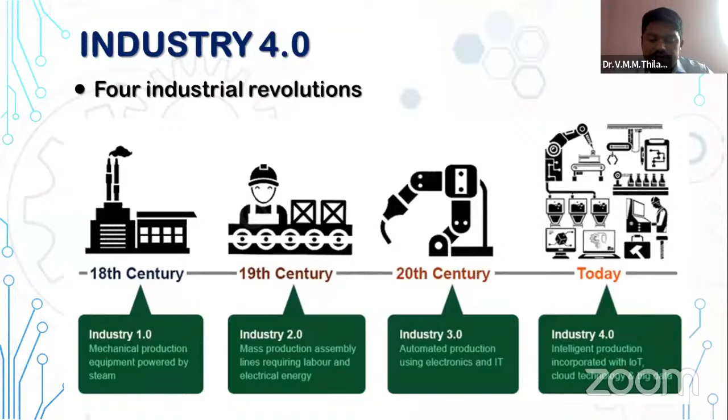So these are the enablers for Industry 4.0: first, Internet of Things, big data analytics, machine learning, augmented reality, and cloud manufacturing. All these are different enablers for the Industry 4.0 sector. We have devices like RFID, sensors, and actuators used in order to get more data for Industry 4.0.

There are many Industry 4.0 examples I can quote. One good example is fund transfers, which we use in recent times - we don't use actual cash now. Very soon, even this virtual cash transfer is going to be revolutionized by decentralized cash transfer systems like blockchain technology. We already started having cryptocurrencies which can be used for transactions. In the near future, we will have cryptocurrencies in place of actual currencies. Using blockchain technology, even property sales and everything will be done using blockchain. Real estate, banking sector, everything is going to be revolutionized because of blockchain technology.

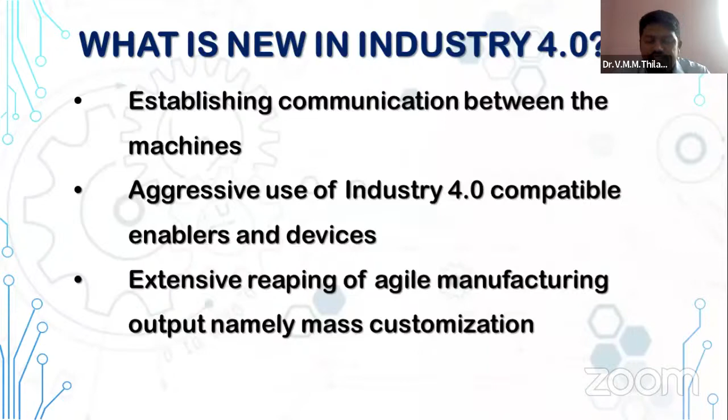Regarding my research work, as mentioned, I completed my full-time research in 2016-17. At that time, I did my research on Internet of Things. What I did is I took a traditional manufacturing product, a pump. I took three different types of pump, added internet to it. All the data were recorded and it was controlled using an app. I'll explain it as a case study for a better understanding of the use of technology using IoT and Industry 4.0 in agile manufacturing. So in future, just like the pump and all other devices, every equipment around us will have a network.

All these things, even lights, will be connected. Now we have devices like Alexa. Just the moment you enter the house, you can ask Alexa to switch on all the lights, switch on the air conditioner, refrigerator, even the stove. Because every device in future will have internet in it, and it will capture all the data and be remotely controllable. These IoT devices will include sensors, smart locks, smart lighting, and many embedded systems.

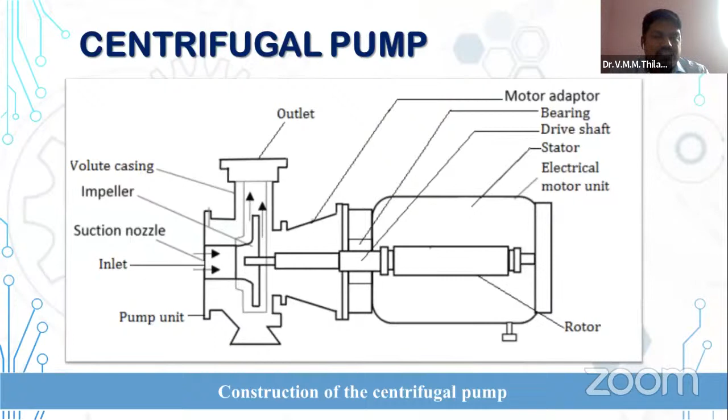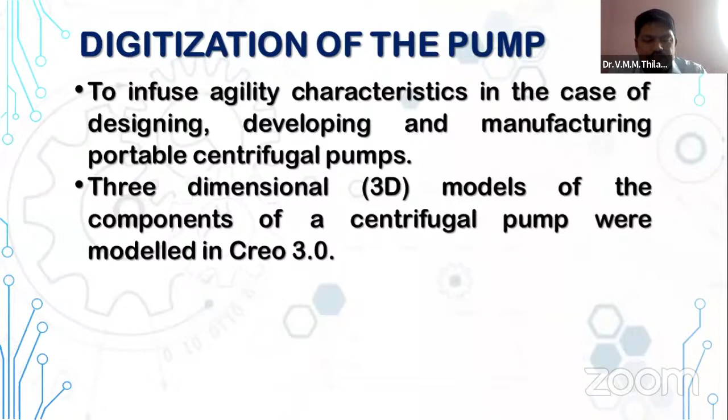So using the monoblock centrifugal pump, I took their different drawings from their data and devised a digitized version, a 3D model, in order to infuse the agile characteristics. A digitized three-dimensional model of the components of the centrifugal pump was modeled. You can see different components were modeled using Creo software. After designing all these components - finally, they don't have such a digitized version, which is the main disadvantage of traditional manufacturers. They don't have the digitized version. Only when they have the digitized version can they make further changes in the same product.

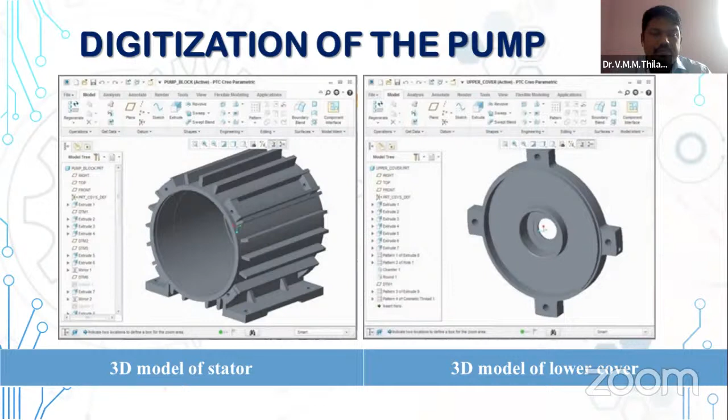The absence of such technology has stopped them from adding R&D to the existing product. So the existing product has been completely digitized, and then we carried out a study on the factors that customers prefer.

So I used a fuzzy AHP approach, an analytical hierarchy process, in order to prioritize three features. The first feature is functional features, the second is ergonomic, and the third is aesthetic.

All customers give more preference and choose to buy a product based on these three features. If a customer goes to buy a product, either online or offline, they give importance to these three. This was found using the fuzzy AHP approach, where other features like cost and brand were also added, but only these three were prioritized compared to all other features at the end of the fuzzy AHP results.

When you compare the functional features, that is the performance of the pump or product, customers give more importance to functional features rather than ergonomic and aesthetic features. High importance is given to functional features. If you see a pump, they give importance only to the HP - how much power it can pump, how much discharge it can provide, how much height it can pump. Only those functional features customers give more preference to.

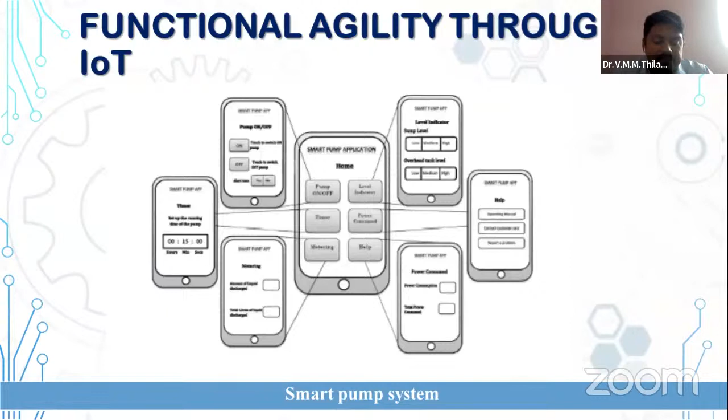You can see here, we have sensors, as I mentioned earlier, in the sump and the overhead tank. Once the overhead tank level goes down, immediately we will get an indication in our app and it will switch on the pump automatically. We can monitor everything using our mobile phone itself, using the smart pump app.

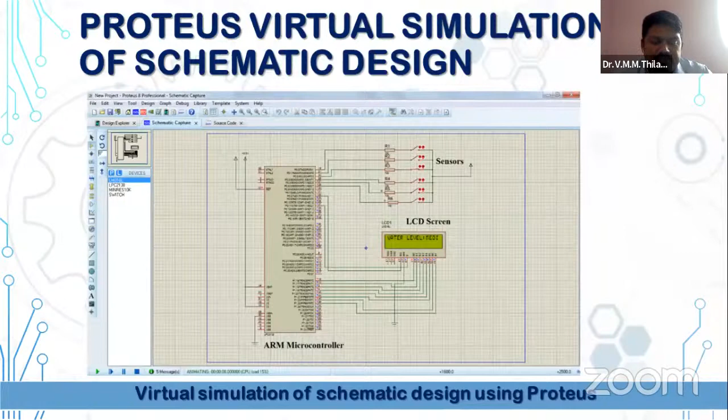So this Internet of Things, which was added to the pump, has been an innovative feature.

After designing and developing the smart pump app, I presented it to the manufacturers and they were excited, and they have taken it for further research.

Because once they adopt it, it will be an innovative feature which will excite the customer. If you say that there is a pump for sale which has innovative features, which has internet you can control using your mobile phone from anywhere, and you can also track the amount of water discharged, what is the level - everything can be seen in your mobile phone - of course people will be excited and people will be ready to show it off to their friends and relatives.

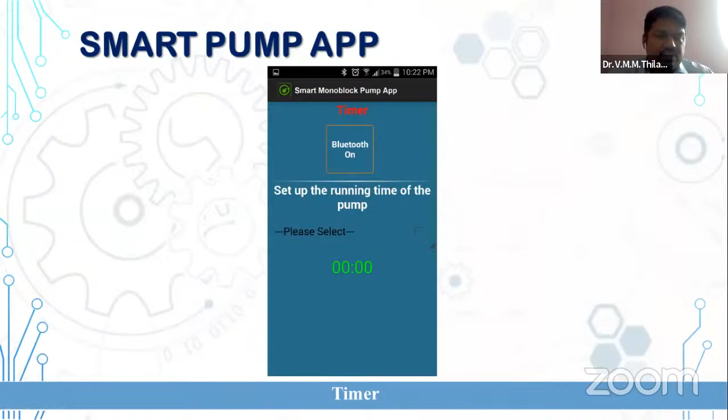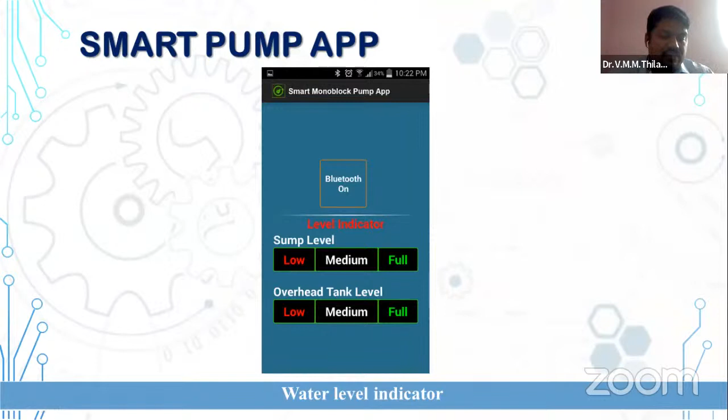So this pump app can be operated, as I mentioned earlier - you can select the time. If you want to select it for 15 minutes, it will run for 15 minutes straight and switch off automatically. And this level indicator will show you the level of water, the sump level, the overhead tank level. It will show you whether it is low, medium or full.

And power - this water control is required. It's the need of the hour because we are moving into the water scarcity sector. So better water management has to be done.

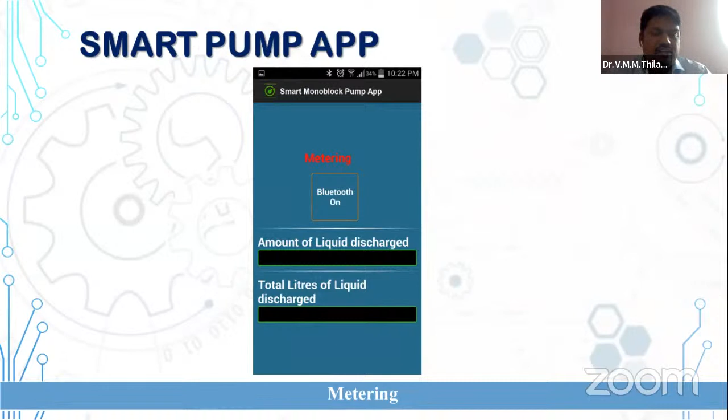So metering can also be done - the amount of liquid discharged, total liters of liquid discharged, everything can be monitored. That is the advantage of IoT. Everything can be monitored, and all this data will be stored. You can find out how much liters of water has been discharged in the last month just using this app. If you find it out, you can manage things more effectively, because you can't control anything until you measure it.

Right? This applies to everything in our personal and professional life.

You can control something only when you measure it. That's why we are measuring everything, even the power consumed. If there is overconsumption of power, or some issue in the operation of the pump, an indication will immediately be shown.

Just like how your car shows an indication, the engine check light, similarly your pump will also show an indication. This is just an example of an IoT device which can be used for smart pumping.

This is the help feature where you can access the operating manual, where troubleshooting videos will be available so you yourself can repair minor issues. Customers look for such things. The moment they get an issue, they go to YouTube to check it—we all do the same thing. So to avoid that, we give them an operating manual with troubleshooting videos, so small issues can be handled by the customer itself.

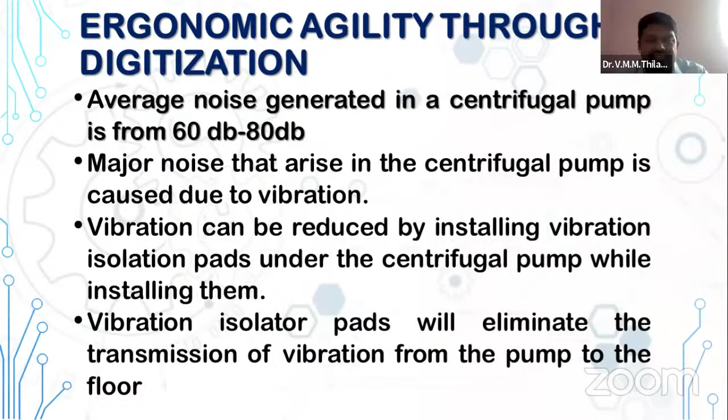All these things were possible because of digitization. When we created a canopy and a digitized version with an attractive canopy, and presented it to the manufacturers, they were excited to see how the product would look in actual.

In terms of aesthetics, modern customers attach high importance to the aesthetic features of products. A product with good aesthetic features is more attractive to the modern customer. Comparing to a normal product, customers give importance to an aesthetically designed product which is visually appealing, and this excites the customer.

They will be in a better mood to buy it. So it is important to infuse aesthetic character, but it is not imperative—not everyone gives importance to aesthetics, especially for a functional product like a pump. But when you add aesthetic features to a pump, it becomes an added advantage, giving a competitive edge over competitors in the market.

So thermochromism was adapted here, where a color-changing pump was introduced. Thermochromic paints change color when the temperature changes. As the temperature goes up, the thermochromic paint becomes transparent and colorless, revealing the base coat of the pump.

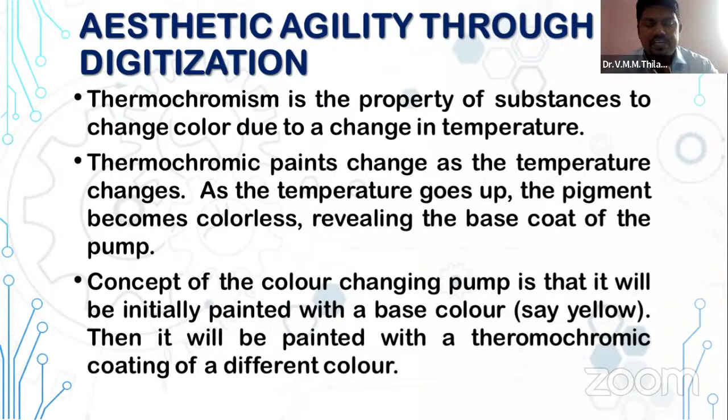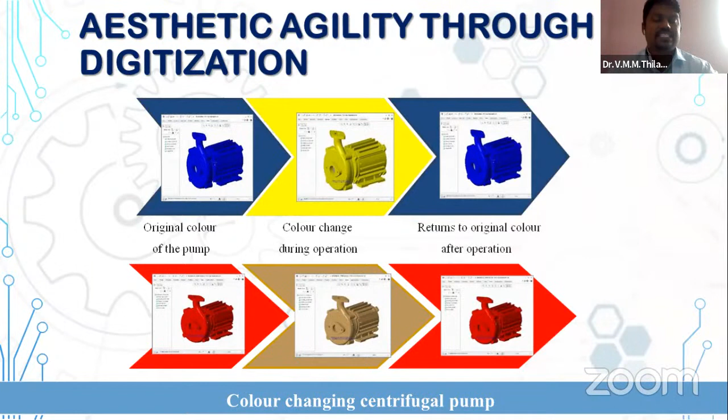So when the pump is operating it will be in a different color, and when it's switched off and cools down, it will be in a different color. This was also an exciting feature that might excite the customer—a color-changing pump.

This thermochromic paint is also used in cars. There are videos on YouTube where cars are painted using this thermochromic paint—when it goes into hot sun, the car color immediately changes, and when it cools down, when the engine is not running, it comes back to its original color. So such a feature can also be done.

These additional functional, ergonomic, and aesthetic features were improved in the digitized version of the product, and a new product was made and presented to the manufacturers, who presented it to the customers, who were excited about getting such products in the market. Further research and development is going on. The main disadvantage I found at the end of my research is that traditional manufacturers, unlike modern manufacturers, don't use any of these modern technologies.

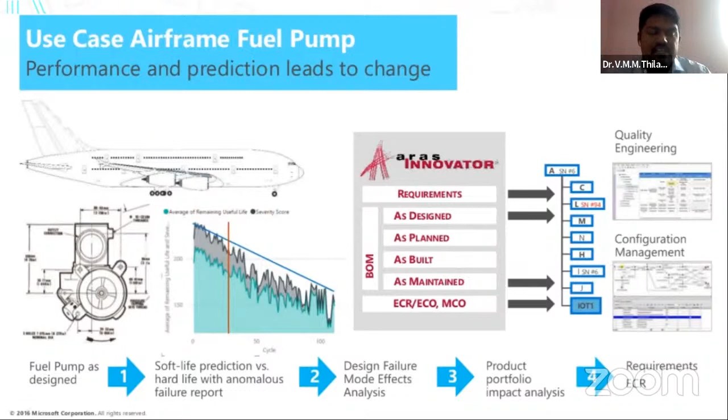So not only aircraft sector, we are using all these IoT and other devices in the modern manufacturers, which are known as smart manufacturing systems.

So in order to conclude, there are, of course, to be frank, challenges in coping up with the industry 4.0 scenario. Comparing to all the other countries, we are far behind, but we are marching fast in order to cope up with them.

The modern manufacturers are coping up in order to imbibe this industry 4.0 concept, and the absorption of high quality and quantity of knowledge about industry 4.0 has to be done. More such faculty development programs have to be conducted in order to enlighten the faculties to carry out researches in such industry 4.0 and IoT devices, so that from the educators, the new engineers and the modern manufacturers will start imbibing such factors. New researches will be done, new publications will be done, and we will be coping up with the modern industries. The traditional Indian manufacturers can also start adapting the Agile manufacturing concept and industry 4.0 concept.

And when you compare the application point of view, high application, numerous amount of applications are available when we implement the smart factory system by incorporating the industry 4.0 enablers and devices. Once it has been done, then there is no turning back. We can also become the manufacturing hub, just like how we are the vaccine producers of the whole world. We will become the manufacturing hub of the whole world because of the smart manufacturing systems.